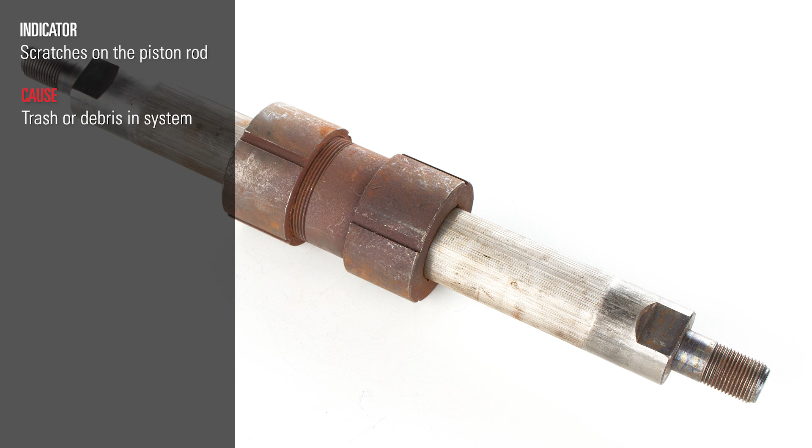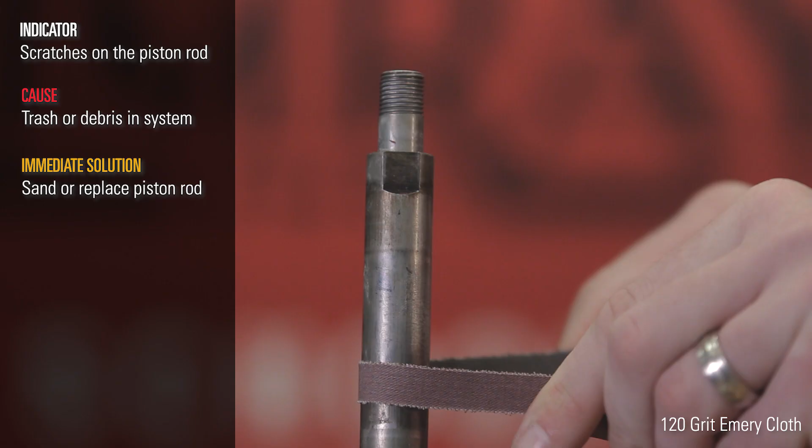The first reason for Glycol Pump failure is scratches on the piston rod. The cause for this scratching is likely some sort of trash or debris in the dehydration system that's made its way all the way to the pump. You can either sand this piston rod down or replace it. If you sand it, use 120 grit emery cloth, but be careful not to sand it too much. If the outer diameter becomes too small, the O-ring will not seal correctly.

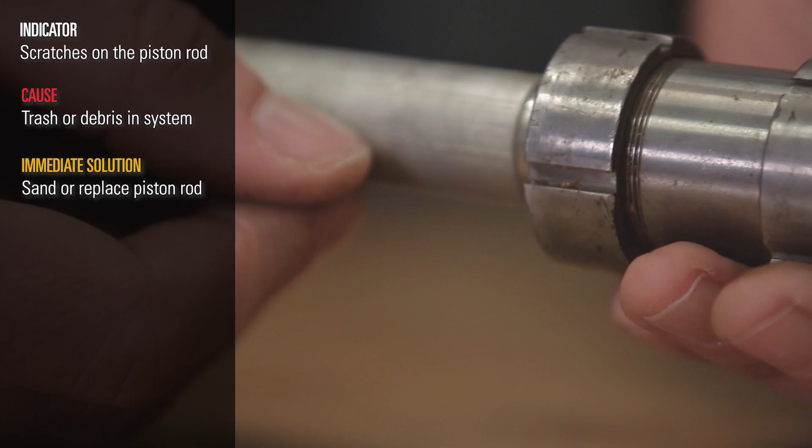As a general rule, if you can still feel the scratch with your fingernail, it's sharp enough to cut an O-ring, so the rod needs to be replaced. The solution for this problem is to use finer filters or possibly change your filters more often. There's typically one filter on the suction side of the pump and one on the tower side.

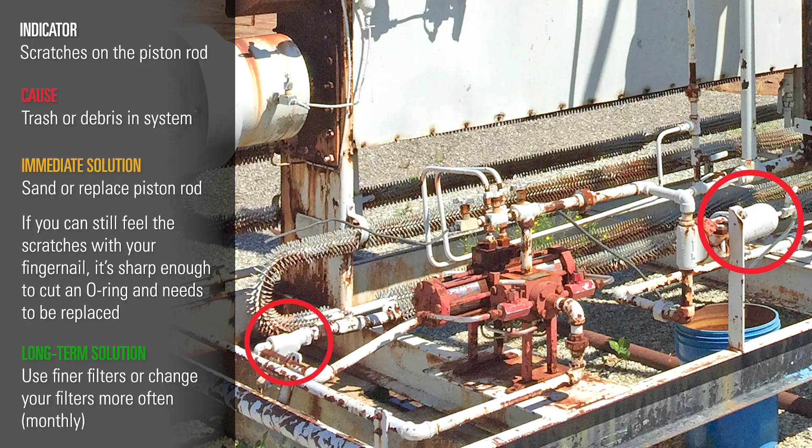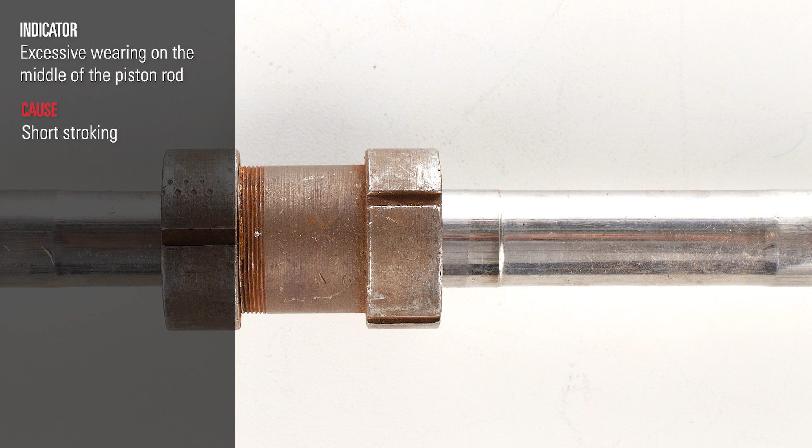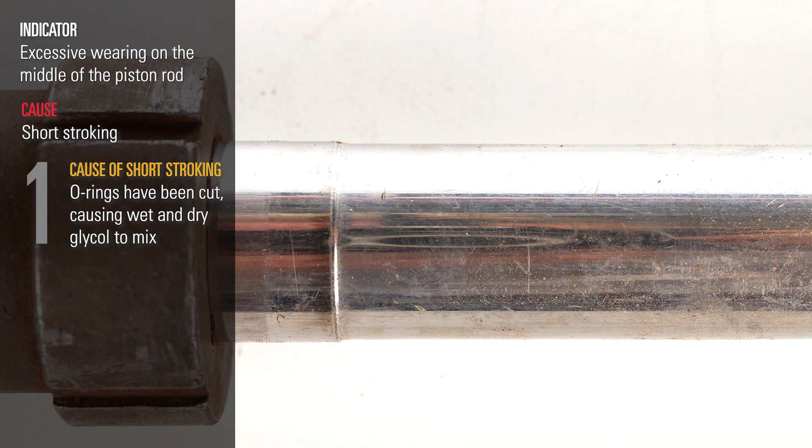The second cause of Glycol Pump failure is excessive wearing on the middle of the piston rod. Excessive wear in the middle of a piston rod is due to the pump short stroking, meaning it's not stroking at its entire capacity. There are 4 reasons your pump is short stroking. One is that trash has gotten in the system and cut the O-rings, causing the wet and dry glycol to mix. The solution for this is to change filters or go to a finer filter element.

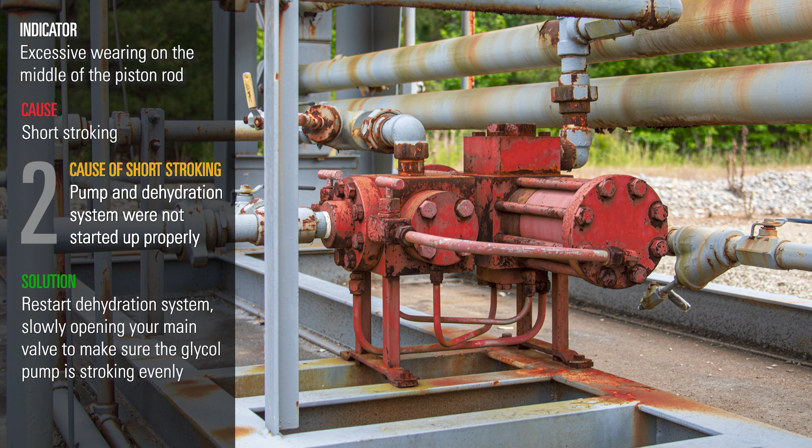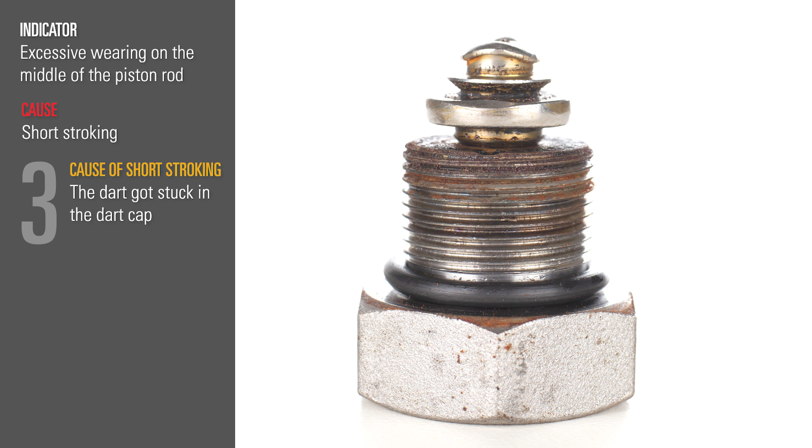A second reason is the pump and dehydration system are not started up properly. The solution for this is to restart your dehydration system, slowly opening your main valve to make sure the pump is stroking evenly. Third, the dart got stuck in the dart cap, causing the pump to skip. This can happen if the pump sits too long between operation or the glycol gets contaminated. You need to take the caps off and clean the dart and caps and make sure they move freely.

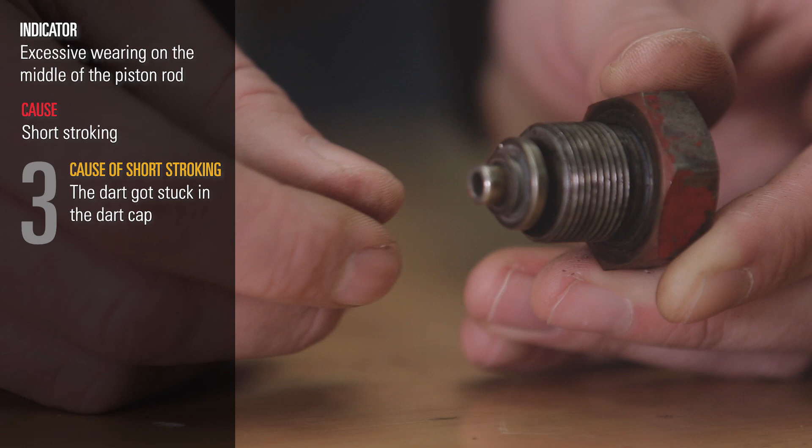If you have a standby pump, we recommend starting it up every quarter to get fresh glycol in the system so the darts don't get stuck. The darts also get stuck due to excessive wear in the caps or the dart stems, which create too much side-to-side play. This will cause the pump to skip. You need to change the dart or cap or both.

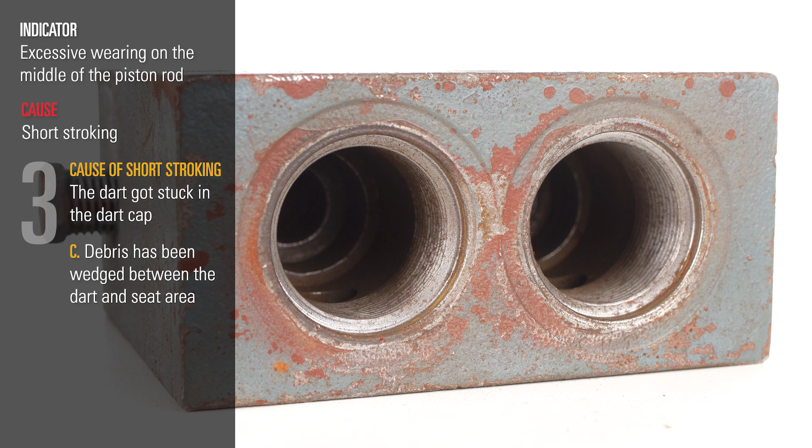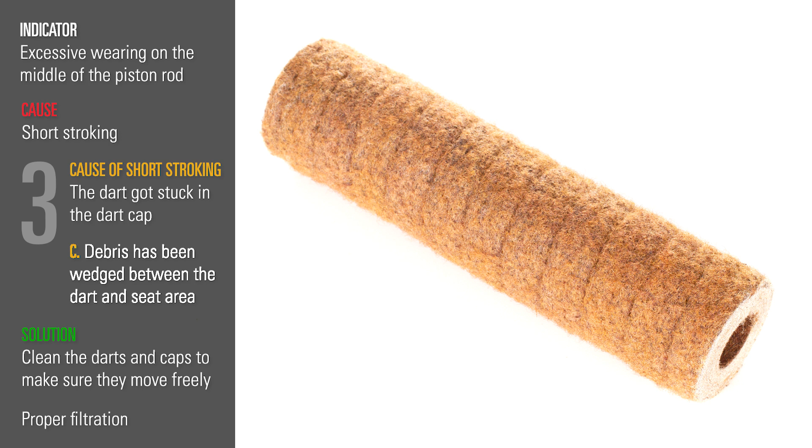Another cause for the darts getting stuck is if debris such as Teflon tape, grass, or straw have become wedged between the dart and seat area. You will need to clean the dart and seat area and make sure they move freely. The solution for this is proper filtration. A fourth cause of short stroking is excessive wear on the cylinder, which will cause wet and dry glycol to mix. This wear is caused by long-term use and the cylinder will need to be replaced. If scratches are present, then the solution for this is proper filtration.

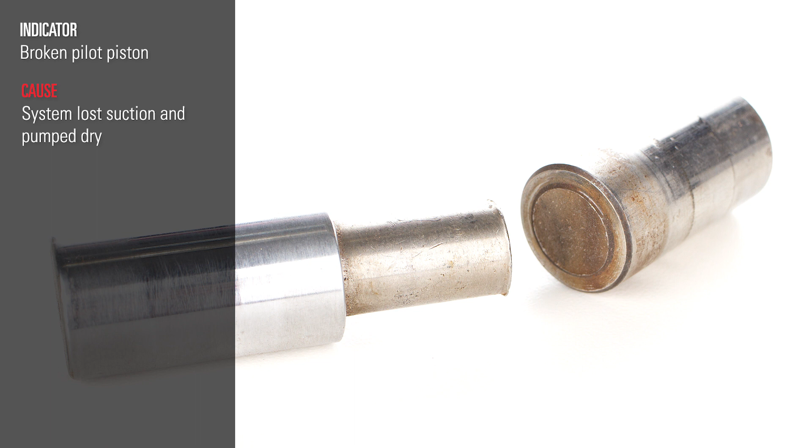The third cause of Glycol Pump failure is a broken pilot piston. The cause of a broken pilot piston is that the system lost suction at some point and pumped dry. This may have happened because of a poor startup and no glycol return, or because an O-ring was cut. Another cause may be that you're losing glycol. This can happen if the pH in the glycol is off, causing it to foam and go out the top of the contactor and into the sales line rather than staying in the system. The solution at this point may be to clean and steam your dehydration system.

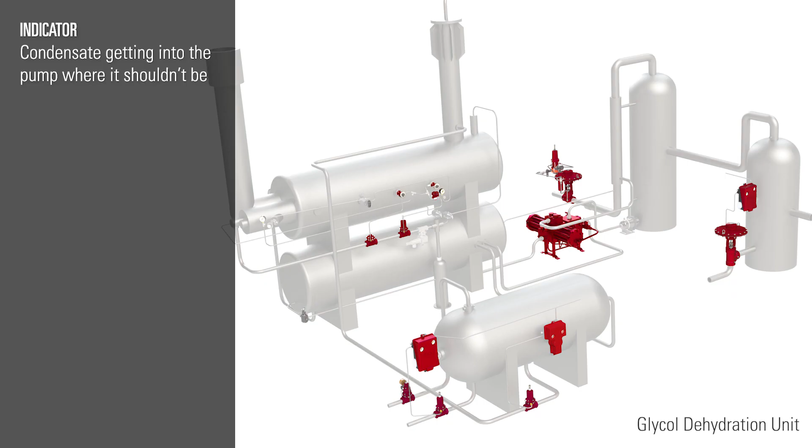The fourth cause of Glycol Pump failure is condensate getting into the pump where it isn't supposed to be. An important word of caution, this condensate is extremely flammable. You need to keep this out of the reboiler and prevent possible combustion. The cause for condensate getting into the pump is a problem with the flash separator or the absence of one altogether. One indicator is if condensate drops out of the pump right when you remove the plugs.

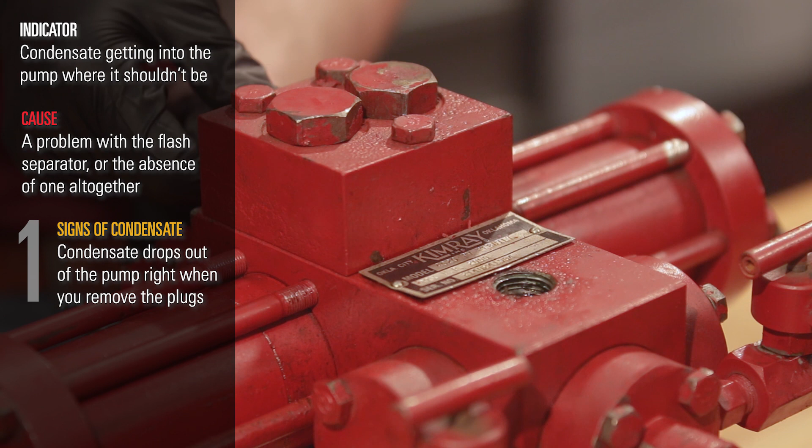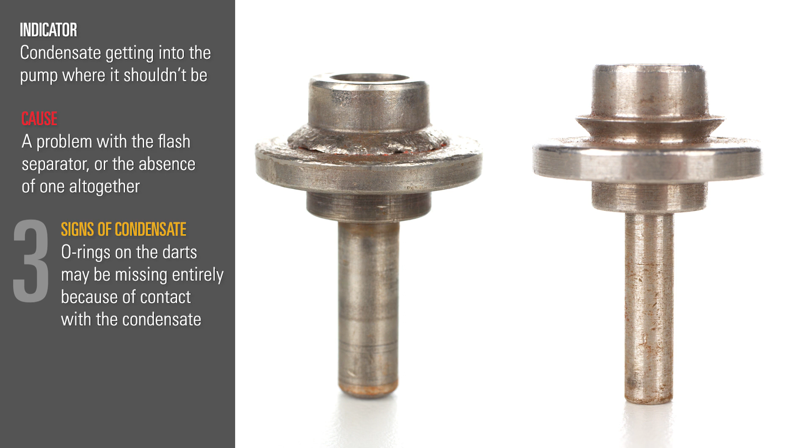Another sign of condensate is if the O-rings have swelled, making it difficult to remove the seats from the suction block or to remove the cylinders. The O-rings on the darts may be missing entirely because of the contact with condensate. The solution for this problem is to check the operation of the flash separator. If one does not exist, consider installing a flash separator in your system.